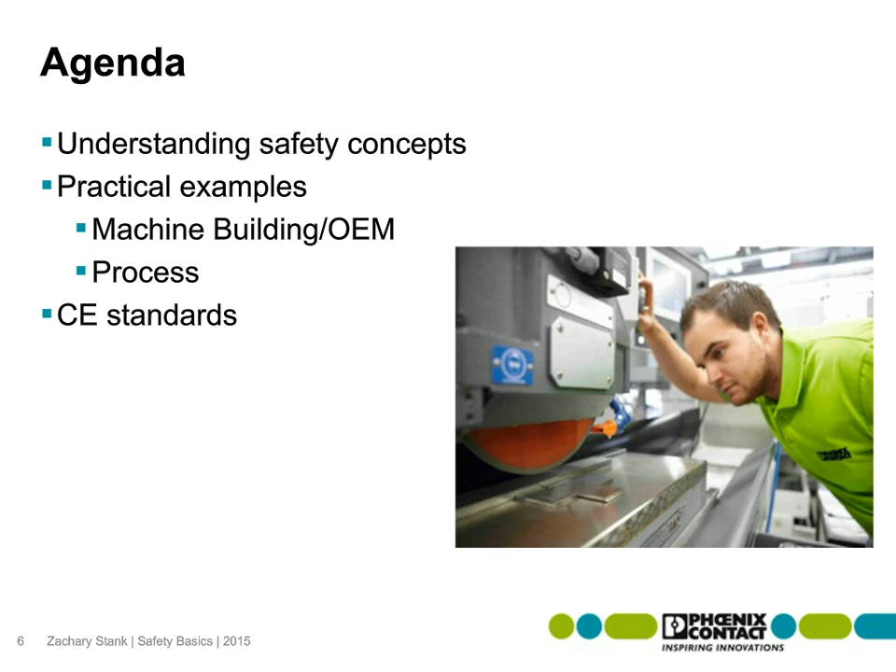So before we start, the first groundwork is to understand what safety is. If you go to the Merriam-Webster website to look up safety, you'll get these definitions. But really, the main thing to understand is that safety is the freedom from the occurrence or risk of injury, danger, or loss. What does that mean for us in the machine building world?

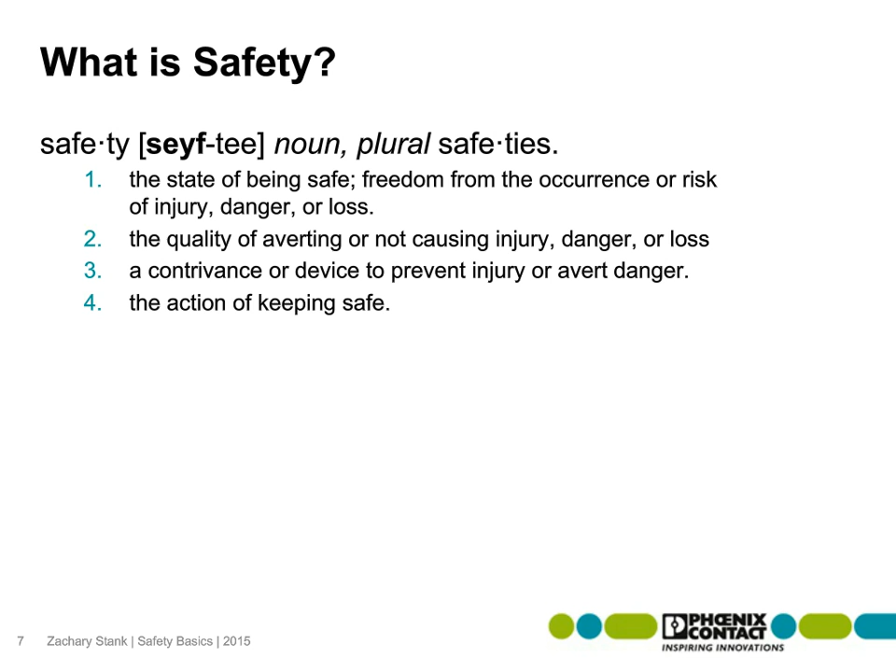Well, really there are three functional areas for safety: inputs, logic, and outputs. Inputs being guards, stops, sensors, light curtains, things like that, and outputs being contacts, drives, motor control systems, those types of operations. In between those two is logic, so that's relays and controllers. Logic is really what interfaces the inputs to the outputs and creates a safe circuit. For Phoenix Contact and safety, we focus primarily on the logic section, so relays and controllers. There are some Phoenix Contact devices that are drives or hybrid motor starters, but we don't do any input sensors at all. So when you think of Phoenix Contact safety, we're talking just the logical portion.

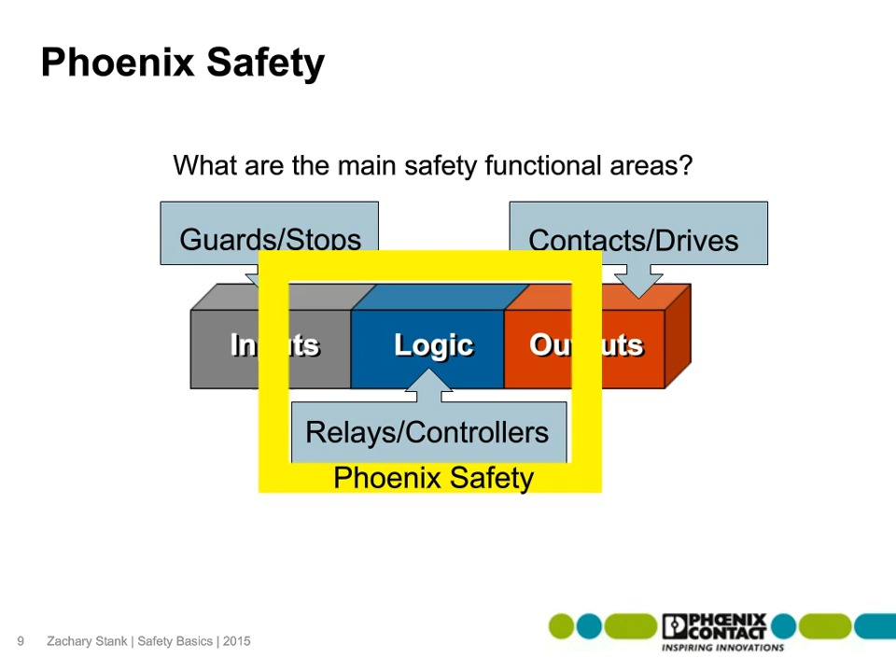I'm sure most of you have seen this before - what is a safety relay? Besides being a yellow-colored relay, a safety relay is a little different than a standard relay in that it carries some type of safety certification with it. Certifications are typically done for performance level, category, or SIL. They give it a special rating that it's been prepared to handle certain types of risk. What a safety relay really does is monitor input to make sure your devices are working properly and that your e-stops or input channels are not malfunctioning. It also monitors a machine start or reset button.

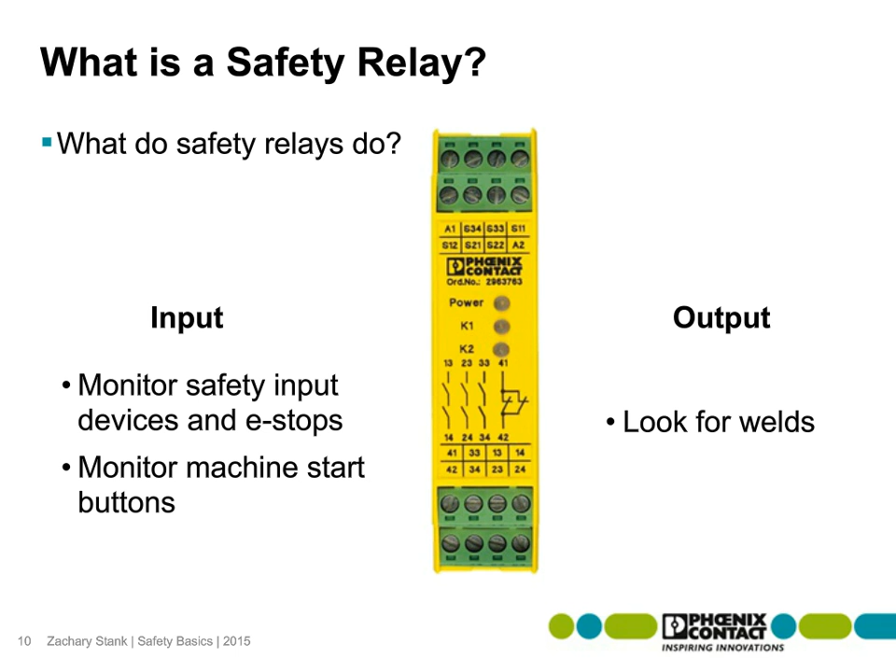It also looks for welds on the output channels to ensure that they're working properly. For most relays, you can also bring your output normally closed contacts into your restart to ensure that any welds on the output channel will be identified. So from a visual standpoint, you're monitoring the inputs to make sure they work, monitoring the reset to ensure there's not a fault, and monitoring your output contacts to ensure there's no welds. That's a very basic look at what a safety relay does.

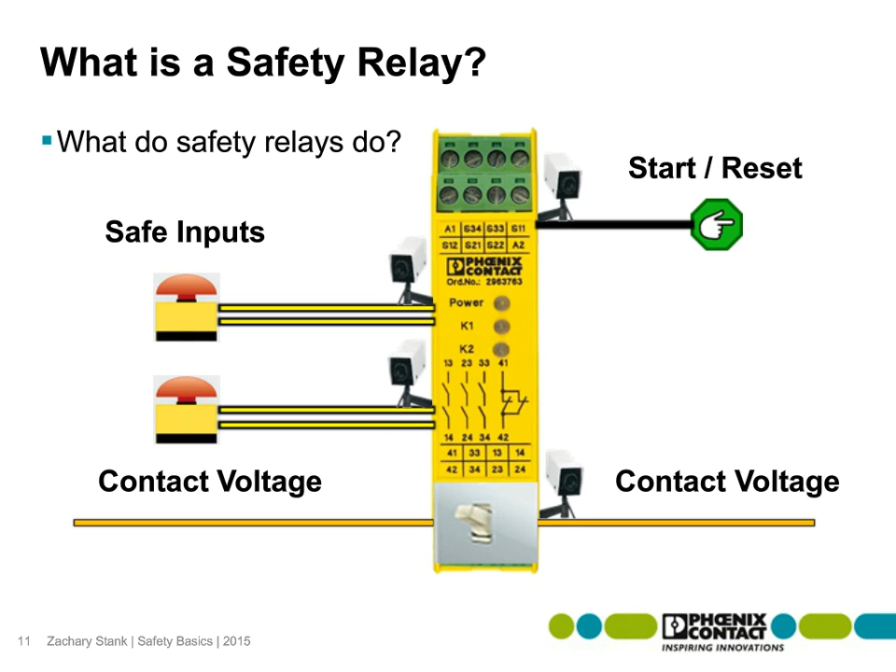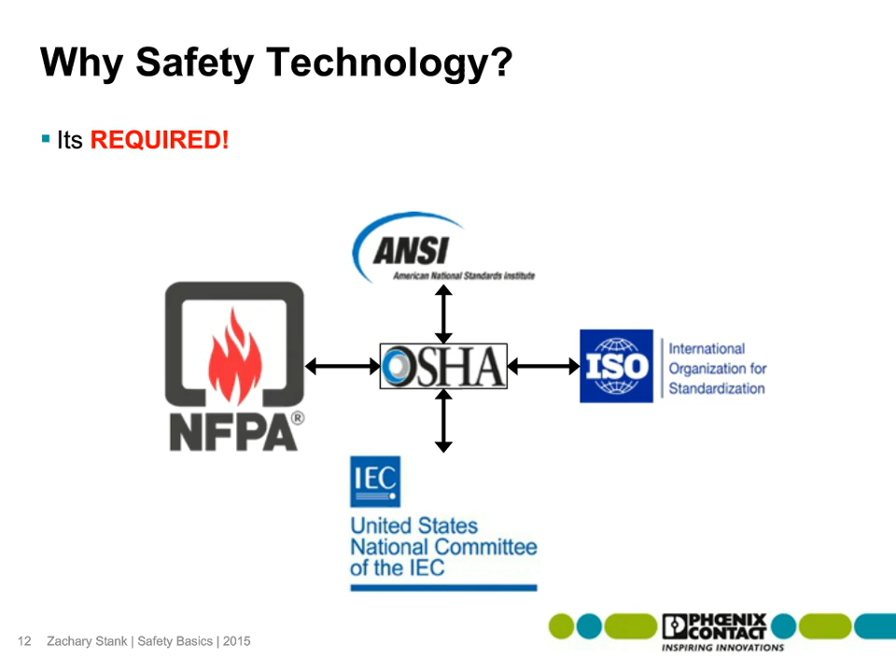So now, understanding the basics of a safety relay and what safety is. The main reason we do safety is because it's required, and the requirements for safety in the United States are all driven by OSHA. I'm sure everybody's familiar with who OSHA is and what they are: the Occupational Safety and Health Administration.

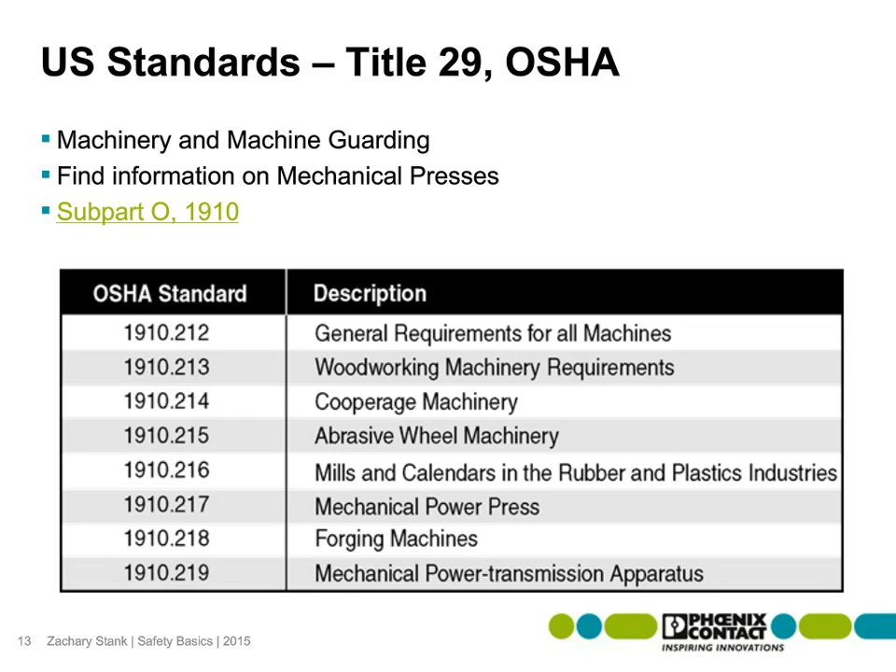Subpart O is what you're looking for again, and you can just go through all their standards online there. So I know most of you are thinking to yourself, great, my application isn't listed by OSHA, so I don't have to do anything. That's not entirely true.

The OSHA standards are quite old; I think the most recent update has been in the 80s, but they're always being discussed and taken online by OSHA. The other thing OSHA has is a right to reference clause. Essentially, OSHA is allowed to reference any nationally recognized standard and bring it into law at any time. For instance, they recognize NFPA 70 as the National Electric Code, so that is something you need to follow.

The other thing OSHA can do is hold you to any nationally recognized standard. So if you are making a machine and you're following an ISO standard or an ANSI standard based on your machine, if there's a problem, they're going to want to see what you followed, how you followed it, and why you did what you did.

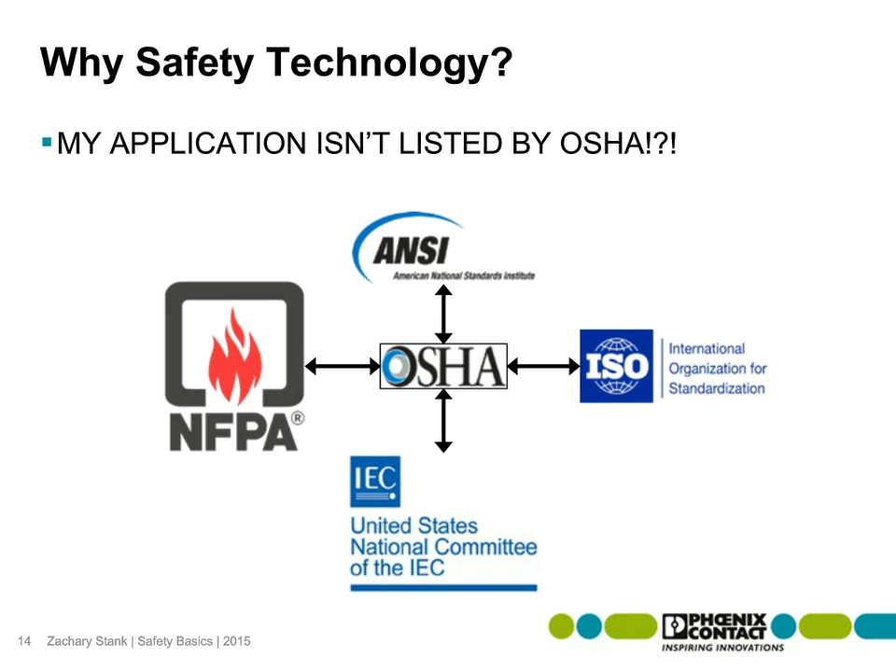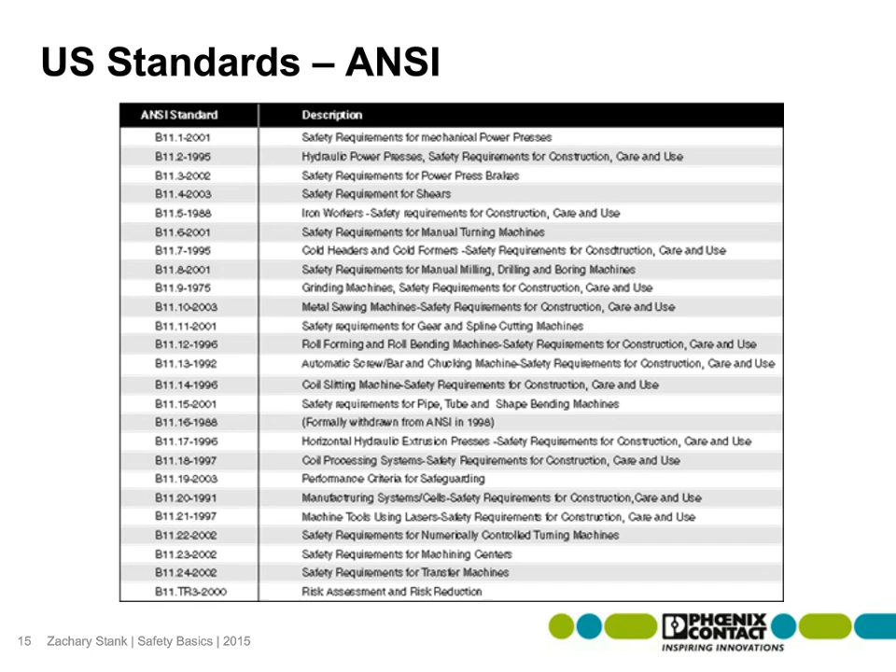But again, the most important thing to realize is that just because you have what you think is covered doesn't mean you looked at the standards and you're okay to go. You want to make sure you cover all your bases, and the best way to do that is, one, to understand what it is you're working in.

So if you're in robotics, you definitely want to reference the RIA standard. If you're machine building, ANSI typically covers that. Oil and gas has a couple different standards organizations; they pull from the IEC, and they have a couple local organizations down in the Gulf of Mexico you want to follow. It's important to go through everything and make sure you cross your T's and dot your I's. But a lot of people don't know where to start once they've actually read and understood what they're supposed to be doing.

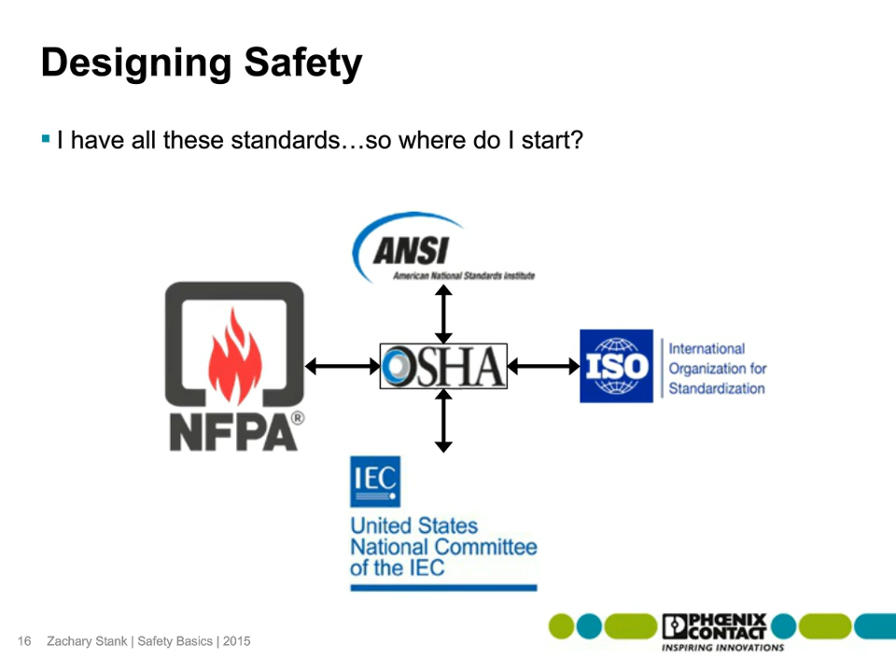How do I start developing safety, or where do I go to look and see if I've done safety properly? And the best answer to that is a risk assessment. Now, OSHA does require a risk assessment. However, they don't require it to a specific standard.

So that being said, there's 4 steps to a risk assessment. There's determination of the machine limits, hazard identification, risk estimation, and risk evaluation and reduction.

All these steps are very important, but I think one that a lot of people miss is the determination of machine limits. And what that is, is determining what are the parts of my machine, what are the most important things in my machine, what can I qualify or quantify. And a lot of people jump right to hazard identification, step 2, without actually going through and writing in everything you need to understand about your machine.

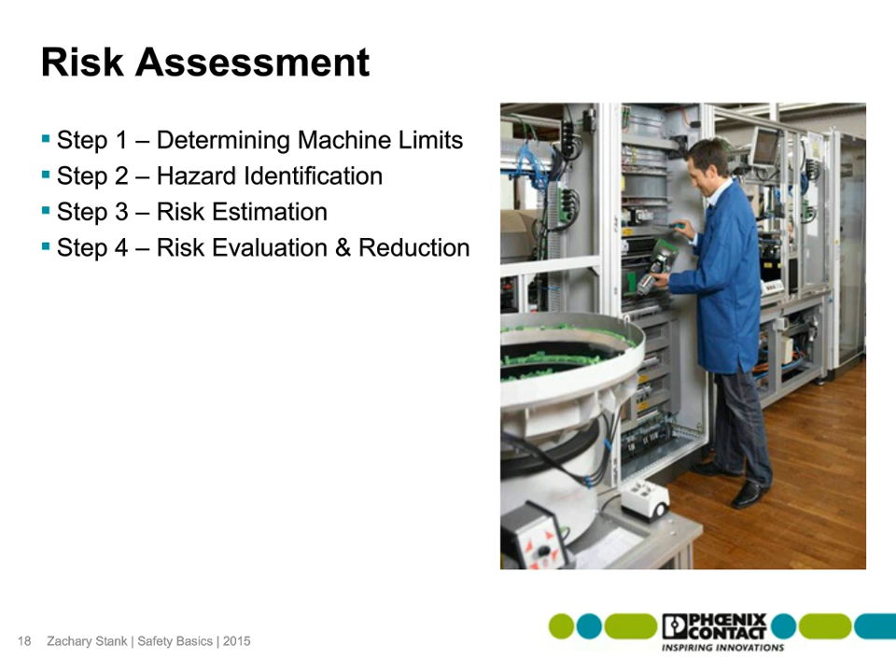And as a flow here, it's important that you start at the top so that you can follow the logical path to creating a safe system.

So for example, if we had a palletizer or depalletizer, you would want to record the dimensions, the weight, electrical, air pressure, cycle time between a pallet, material loaded, how's it loaded, when's it loaded, the product life, how long is it designed to be used for.

And while I'm saying you want to be doing this, your risk assessment team really shouldn't be a single person or just a single type of engineer. You don't want to have all mechanical engineers looking at a single machine because they'll look at it as a mechanical engineer would look at it.

You want all different facets of your corporation involved in the risk assessment. So you want floor operators, maintenance technicians, electrical engineers, you also want your machine engineers, maybe some desk office people that would look at it a different way. It's very important to include everybody in your organization in the risk assessment, not just so that you feel inclusive, but also that they bring different sets of eyes to each different type of application.

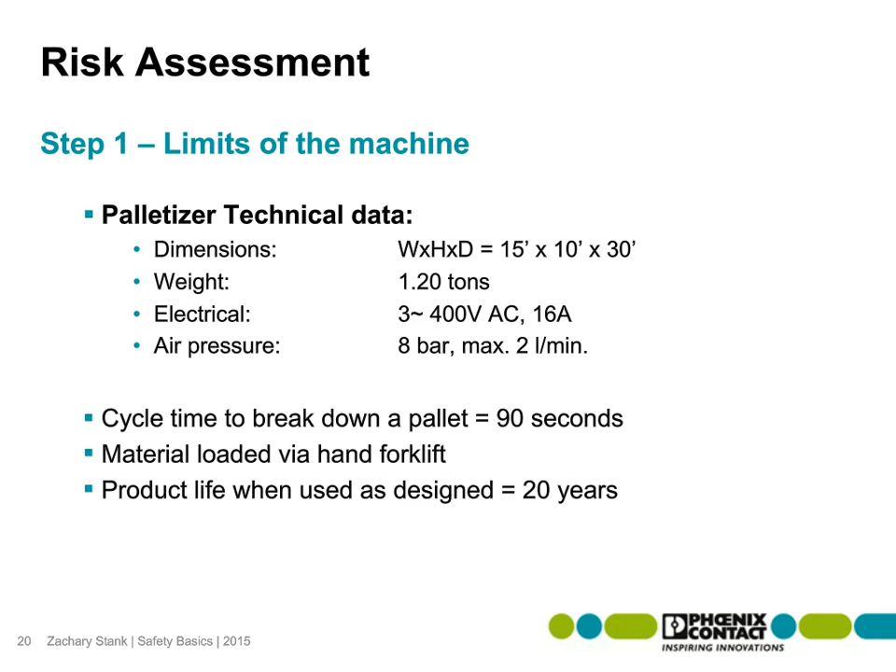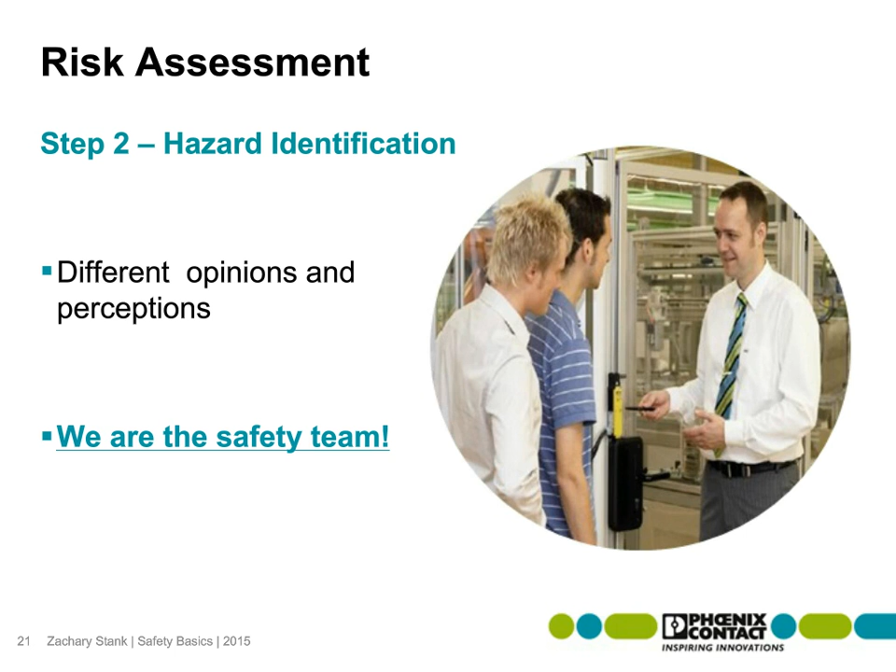So recording these down is important because now I have a list of what my machine actually is, and that's how I identify what my hazards are. Without this list of actual operational items from the machine, it's hard to identify hazards. Yes, you can go through and look at a machine and figure out what it's done, but if you're not actually quantifying what you're looking at, you could be looking over certain aspects of the machine.

So the last 2 steps are probably the meat of everything: risk estimation and risk evaluation and reduction. How likely is this event to happen? How dangerous is the event? How can the risk be mitigated, and is there a safety system required?

One big thing I see a lot is people get into the risk assessment, they start identifying the different risks on their machine. They'll have spinning blades, moving items, issues like that, and they'll try to protect everything with very, very complex systems. Now, very complex systems do work, but they're not always required.

A lot of times for a spinning blade or moving hazards or crushing hazards, a simple gate or just guarding against it, like a fence or something like that, would be sufficient in order to do it. And a lot of people jump right to adding safety product to it. There are situations where guarding against somebody coming into the apparatus is not possible, and a safety sensor and safety logic is required. But a lot of times you can build out the inherent risk of a system just by keeping people out of the area.

And really the risk evaluation and reduction needs to be done if, at times to load material or anything like that, people need to be within a hazardous area, or if there's maintenance time where you need to have specific safe control of a machine.

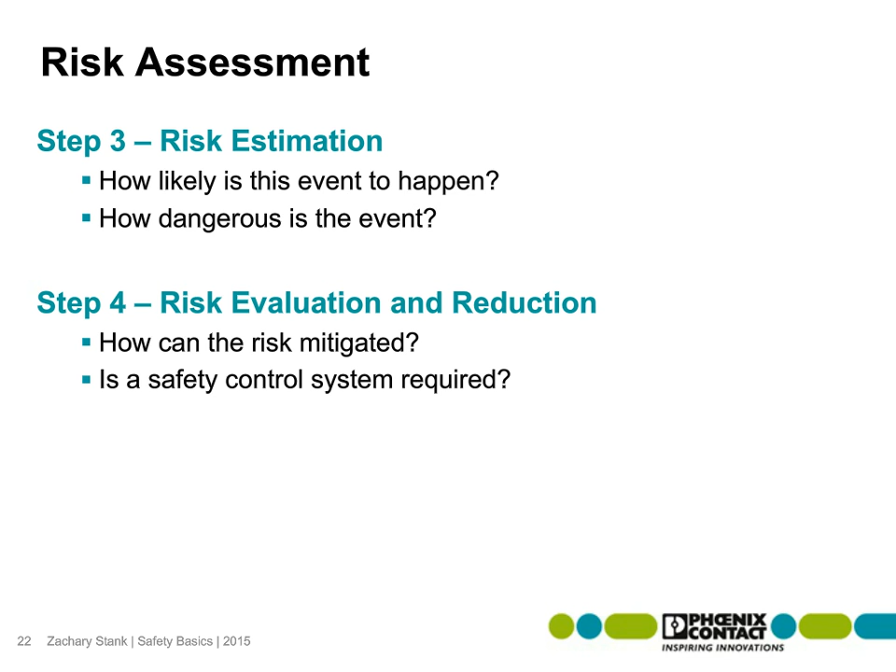So again, everything starts at the beginning by documenting it, and then at the end, you want to make sure that not only are you documenting, but you're also trying to make sure that the documentation is easy to read and that you're not jumping to conclusions.

So you want to understand the design features. Can you design out safety, or design in safety, or design out hazards to protect your workers or protect your machine from itself? If that's not possible, then you want to take protective measures. Try to keep people out of the area, stop motion, stop hazardous power when somebody enters that area or has to do something. And then most importantly, documentation. It's always important to label and put down hazardous areas or high voltage or things like that.

So a documentation step is very necessary in doing your risk analysis.

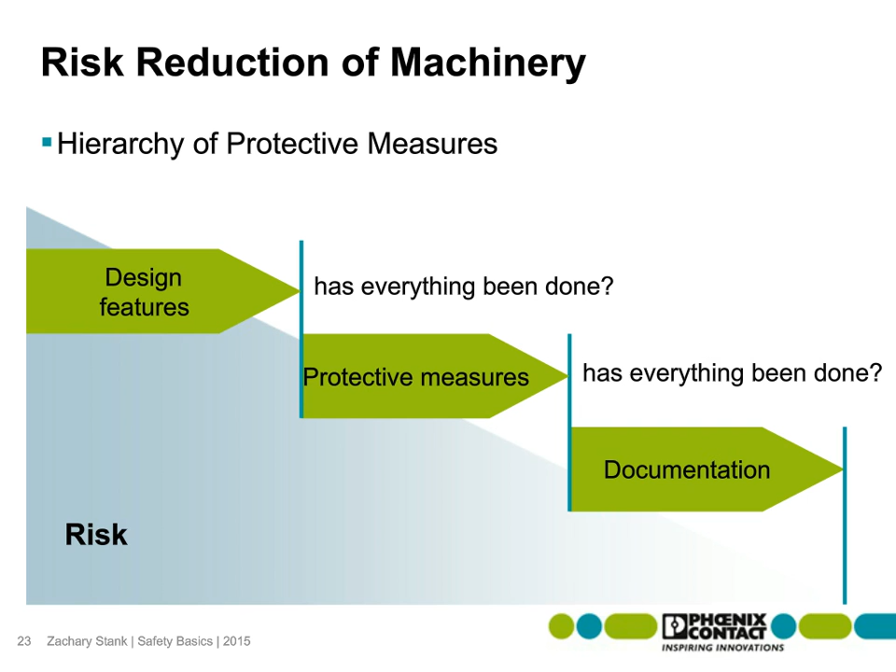So what are some of the protective measures you can take? You could do covers, gates, guarding. Protective doors will allow you to go in when necessary while turning off something. And then you want to protect against material ejection. If you can build a gate around something, or a fence, it's an excellent protective material. You definitely want to avoid people walking by and being in a hazardous area without even interfacing with the machine. So putting in some type of gate or guarding material protects the machine from ejecting, which is also a very good thing to follow.

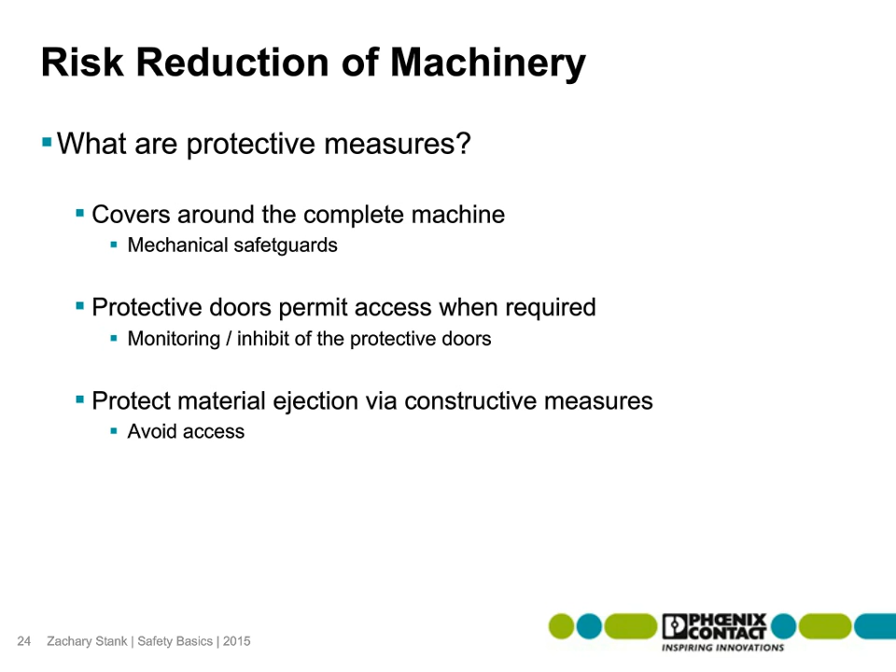So after you go through your risk assessment, you may have determined that a safety function is required. Again, this is an iterative process, so you don't want to just say, yes, we need to do some type of safety, okay, we'll put e-stops everywhere and we're done.

You want to define that safety function. One, because if you over-design, you'll be spending way too much money on safety and over-designing it for your application. And then, of course, if you under-design, you could be at risk for possible hazards and loss of life or product. So it's important to understand how much safety you need.

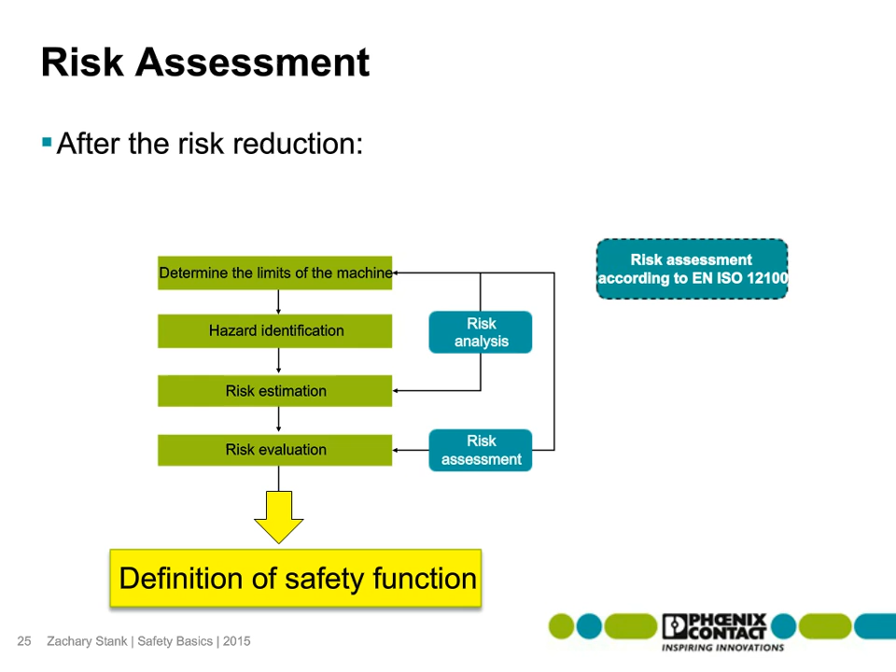The best way to do this is really to look at the European standards at the moment. The two big European standards right now are 13849 and 62061. 13849 is commonly considered the performance level standard, so you hear performance level and category, they're all lumped into 13849. And then IEC 62061 is the SIL standard for machine building. The parent document for that is 61508 and 61511. Also, that's the ANSI S84 standard.

The big thing here is to understand that in Europe, machine builders are ultimately responsible for safety. So from the time you have the concept, or you begin to think of an idea or put pen to paper for a machine, all the way to the end of life, 20 years after the machine is built, you're ultimately responsible for ensuring the safety of that machine. That means while you're building it, you're making sure no new hazards have been created, that nobody gets crushed while it's being done, or you don't accidentally allow power to start, and also that you provide maintenance schedules and the estimated time of life cycle of this machine.

So as you're going through, it's very important to understand, especially when you're shipping out to Europe, that legally you're held responsible for this. Whereas in the United States, it's not as clear cut that the builder, the operator, and the owner of the machine ultimately have some type of responsibility for it, but it's not as clear cut as in Europe.

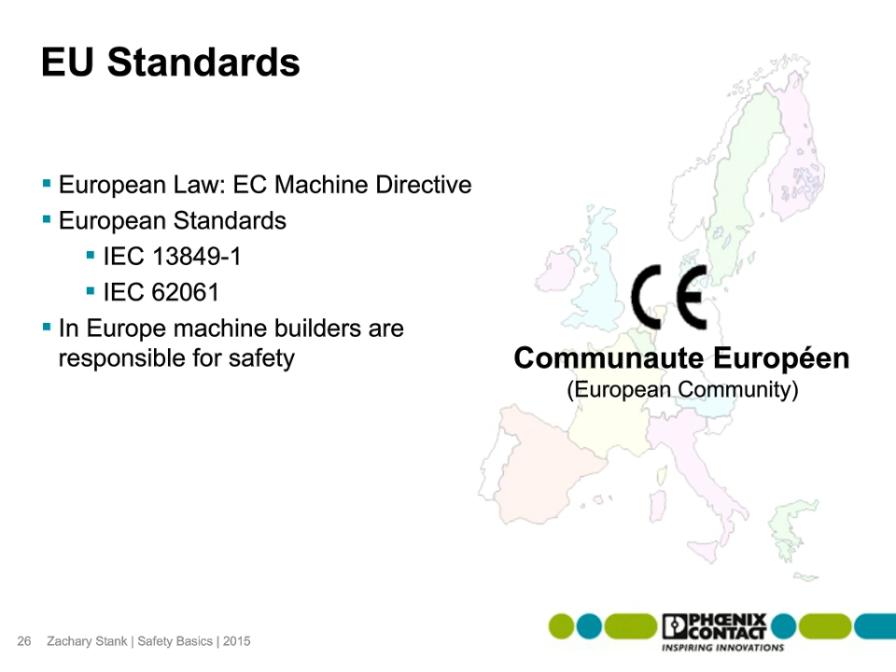So it's coming. The ANSI hasn't directly made its own standard like this that would mimic something like this, but it is in the works.

So we talked again about how there used to be an old standard that was category-based. It was ISO 954. If you're familiar with safety categories, essentially you had single channel and double channel. That's kind of been reworked, adding actual math and technical items to ensure you're not just designing safety based on how much you can spend, but also the needs of the actual machine.

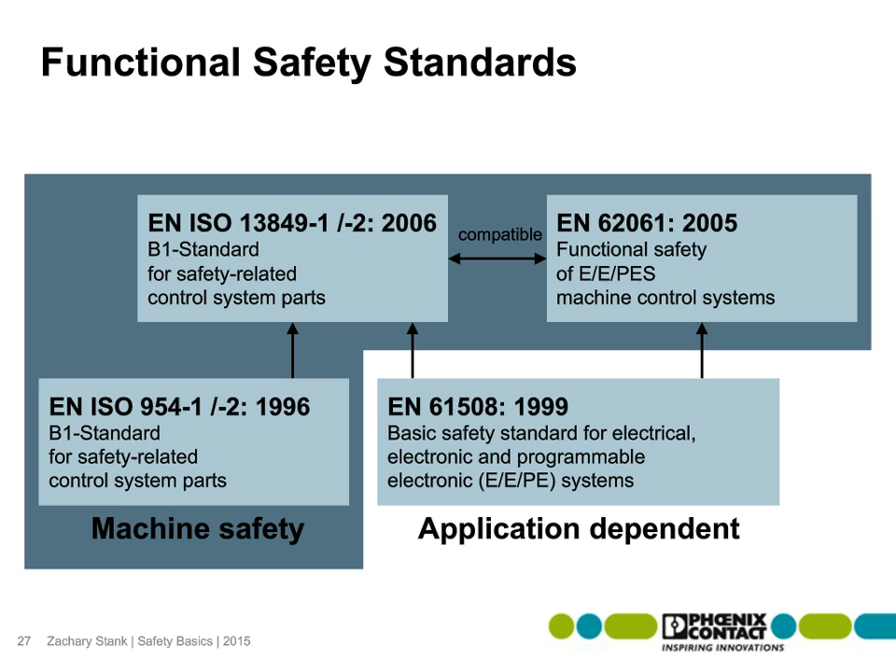From a flowchart perspective, it's quite simple. You ask yourself, is the machine safe? How do you reduce risk? You can do it by construction, using safety equipment, or user information. And if it requires a control system, that's when you need to start looking into how this needs to be done.

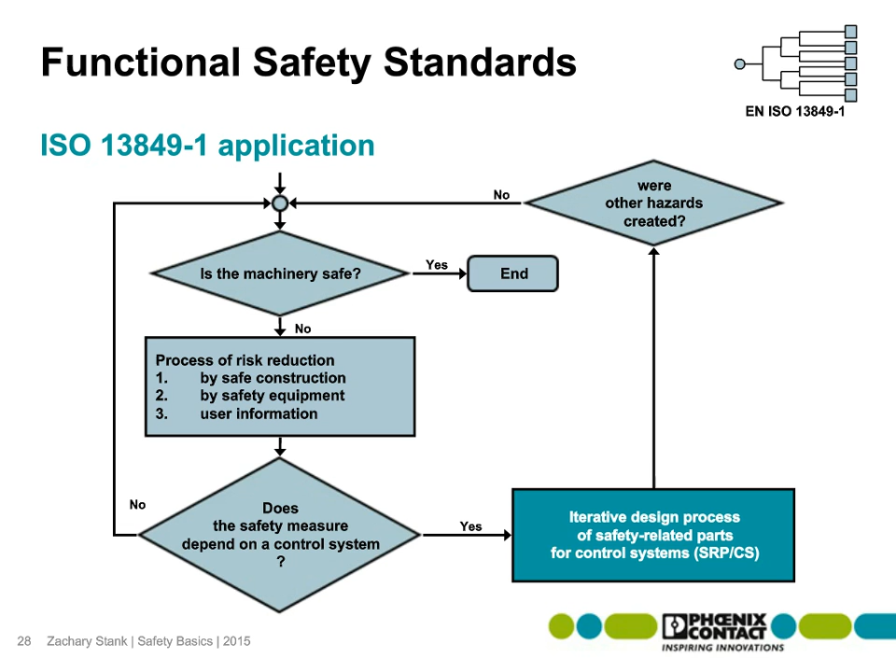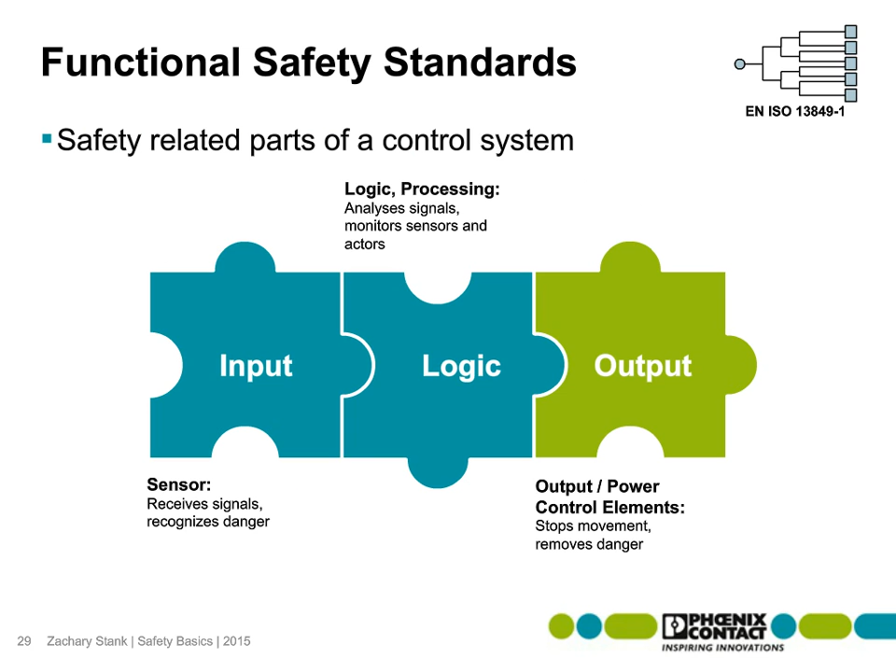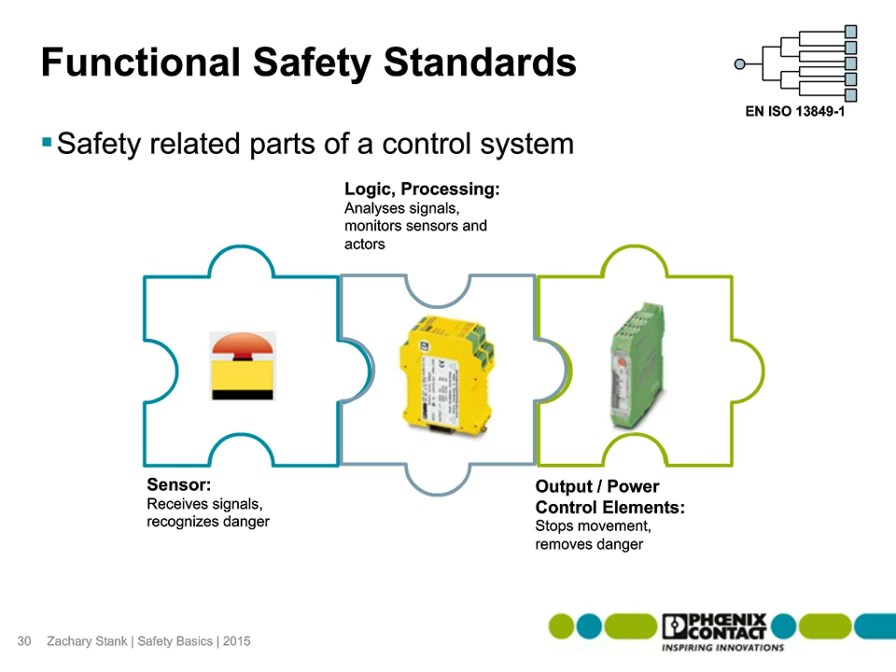So again, like I said previously, there are three separate parts of a safety system when it comes to machine building: input, logic, and output. It's very important to analyze all three facets of this. They're all taken together—think of it as a chain, and you're held to the weakest link. So if you're using really good sensors and logic and processing equipment, but you haven't considered safety on your output side, the weakest link in that chain would be your output, and you'd be beholden to that type of safety.

So according to the standard 13849, you really want to go through and figure out what performance level is required. You need to design it, verify it, and then validate it. Design is taken from an actual statistical point of view.

There's something called the probability of dangerous failure per hour. It's graded from A to E, so performance level A all the way to performance level E. The low end, performance level A, is low risk, so probability of dangerous failure per hour is every 10,000 hours. So you can have a dangerous failure every 10,000 hours of use of that machine, and it won't be that dangerous.

Low risk is minor injuries, bruises, small cuts, maybe some loss of actual material. Whereas high risk could be loss of limb, life, lots of material loss, and or damage to structures—that's at once every 10 million hours. Very high risk, and you're essentially making sure dangerous failures are very, very infrequent at the high end.

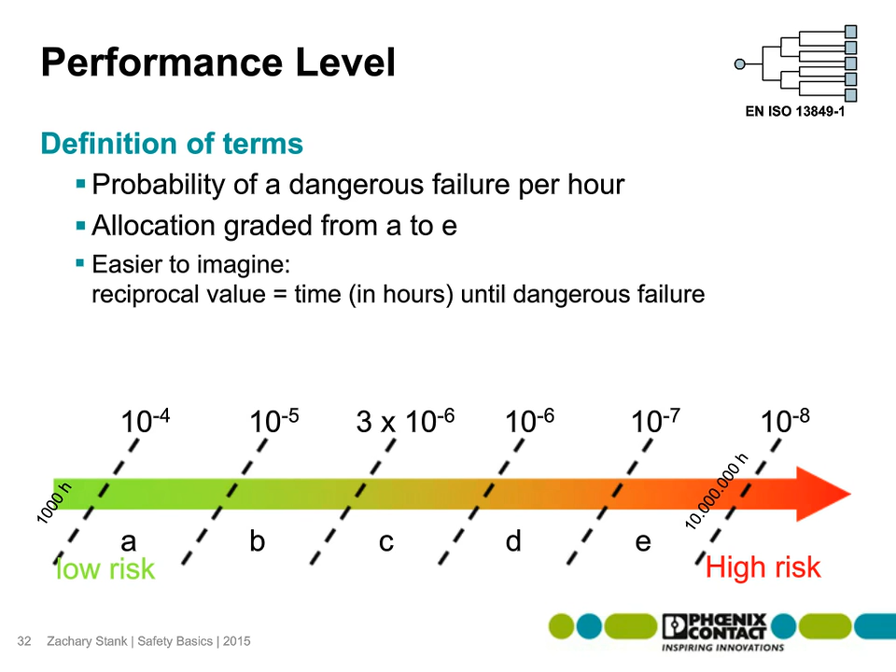So you can think of reversible as small bruises, small cuts. When you start to get to breaks and losing pieces of flesh, then you get into the S2 area. So that's how severe, or how reversible, the injury is.

Duration—how frequently is somebody in the hazardous area? Anything above once per shift is considered frequent. So if you're only in the hazardous area for maintenance once a week, that's F1. But if somebody's in there constantly removing input and output material, that would be F2.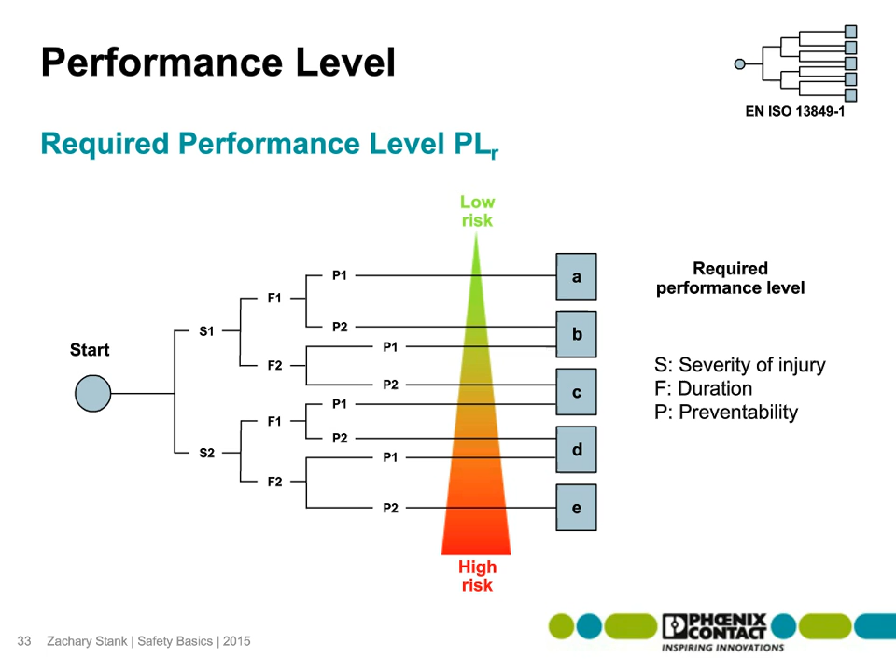Once you have that, then we get into design and technical implementation. If you're familiar with the control categories, they're still used within this. B1 and 2 are essentially single channel design—I have a single input with a single wire going into a single logic controller that goes out to a single output. Remember, the weakest link in the chain is what you're going to follow.

So if I have redundant inputs going into a single logic controller, and they're daisy chained, then the single input would still be only single channel. If my outputs are going outside of my main cabinet and they're being daisy chained on the output side, that again would be single channel. Category 3 and 4 are redundancy. The difference between 3 and 4 is that in 3, not all errors are monitored, whereas in 4, all errors are monitored.

And that was kind of the problem with the old standard. It was tough to understand when some and all became the same.

So if we look here, we also include component quality now. MTTFD is the mean time to failure dangerous. That's not to be confused with MTBF. They are related, but they are not the same. MTBF is mean time between failures, but for safety, you're not looking at the mean time between failures. You're looking at the first time you have a dangerous failure, because that first dangerous failure is going to be the problem. So they incorporate something called diagnostic coverage, or test quality.

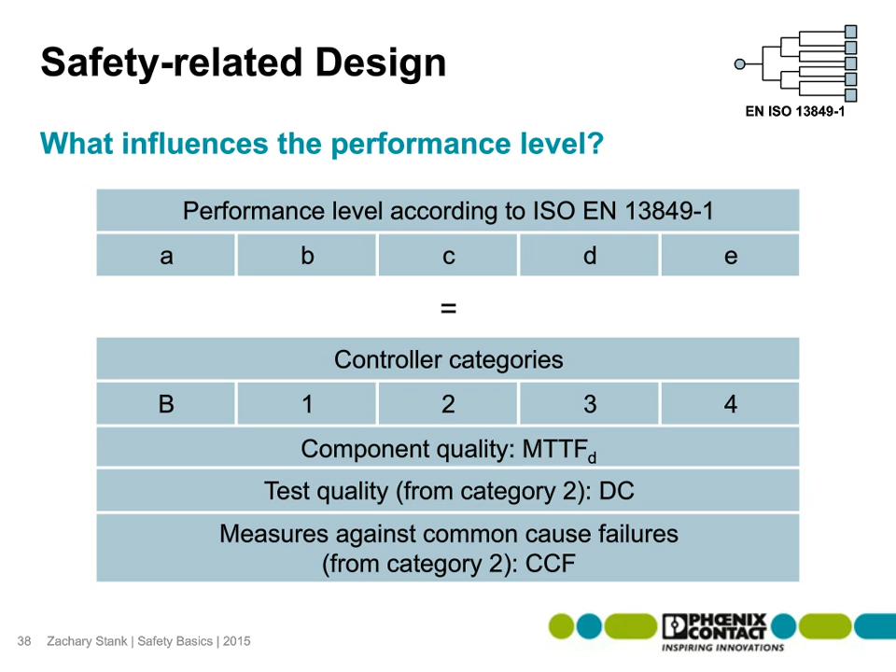So if we go back to the control categories, let's look at it here. Here's a real quick slide you can reference of safety categories for design. Again, the most important thing to remember is B and 1 are single channel, and 3 and 4 are dual channel the entire way through.

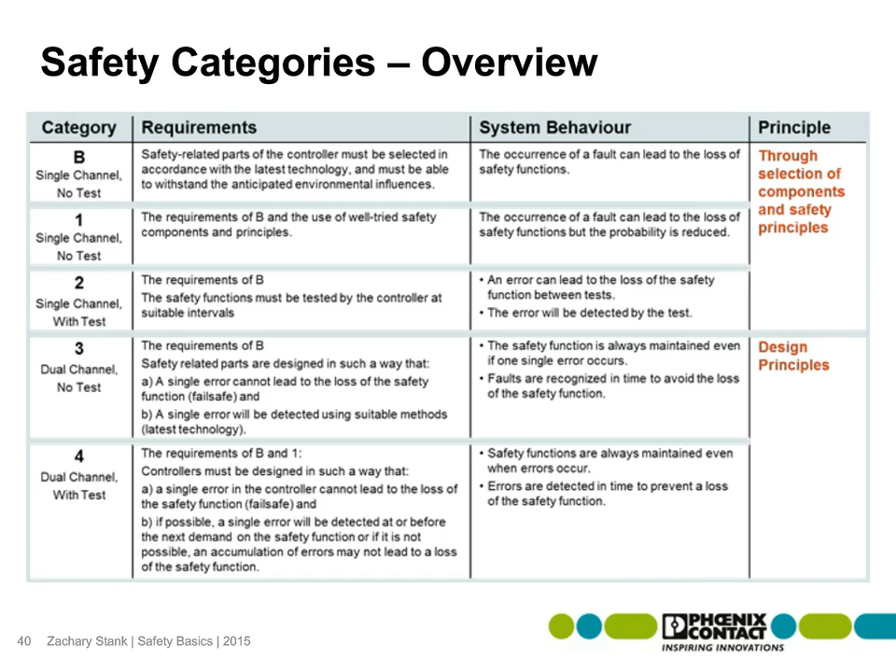So the solid lines identify that you have a really high diagnostic coverage. You're able to determine whether there's been something amiss within the rest of your setup.

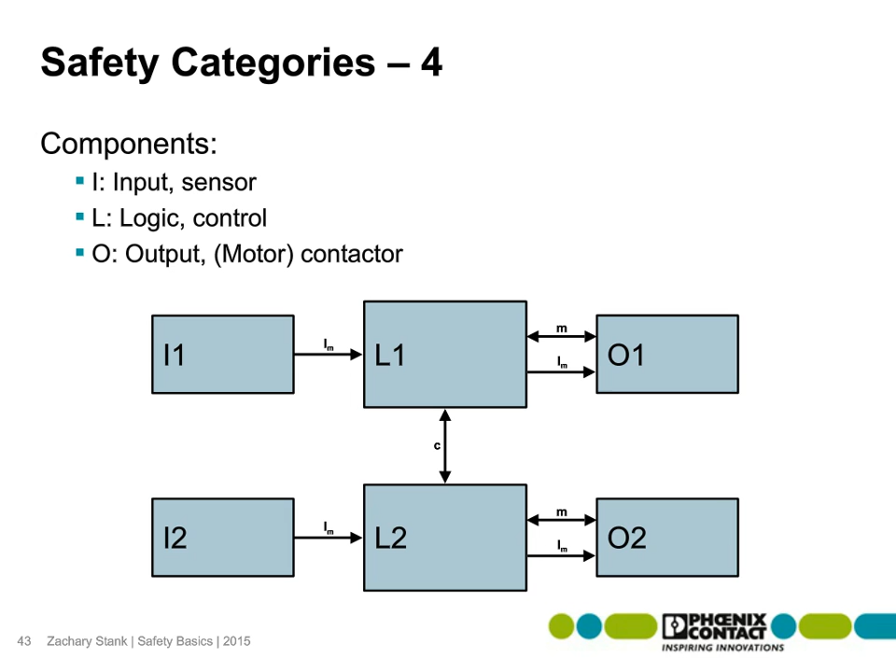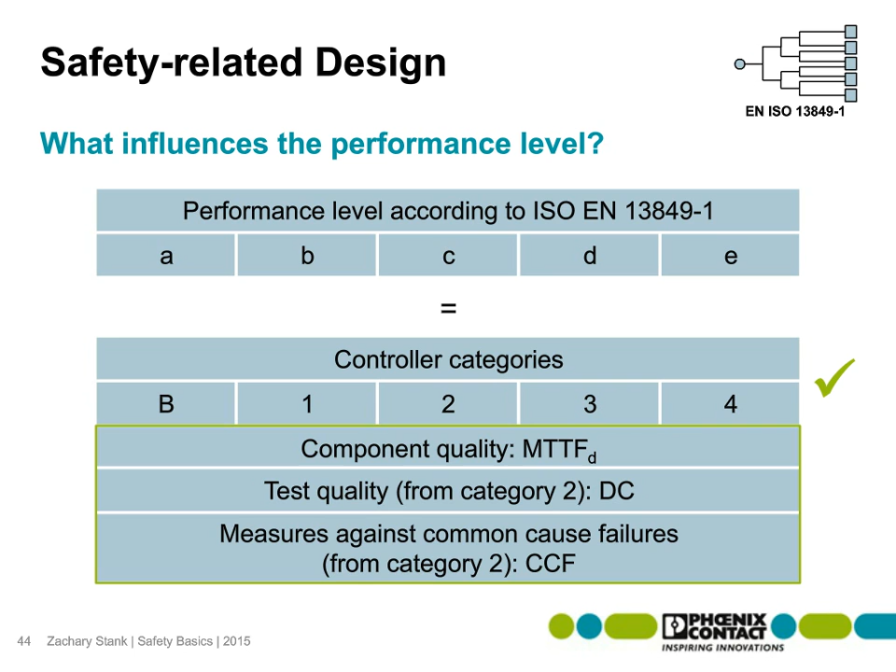So again, we understand categories - it's something we've all done. Then we have component quality, test quality, and measures against common cause failure. Really what these do is they get you to this graph - the relationship between diagnostic coverage, category, and mean time to failure dangerous.

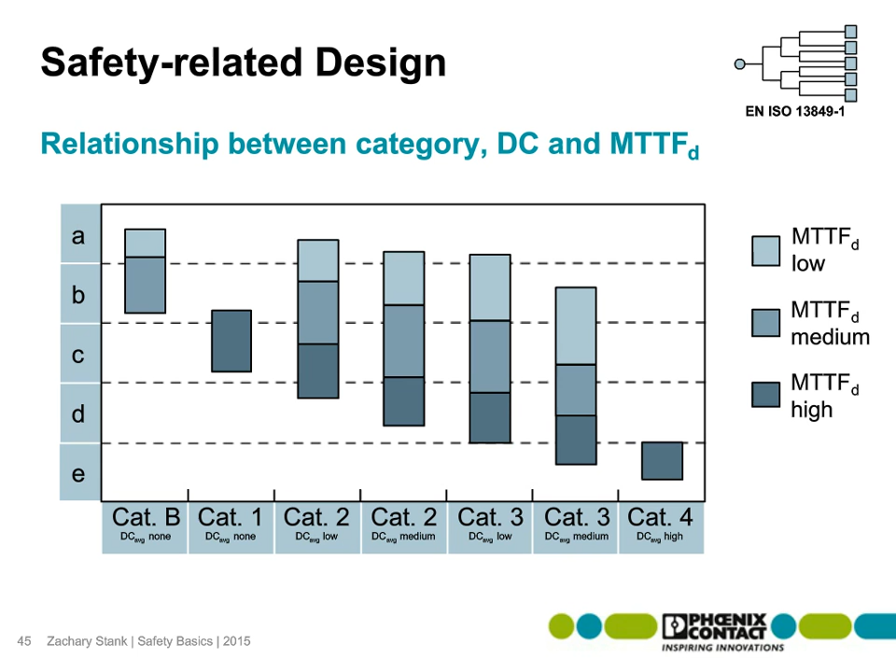And there's a really specific way to read this. The first thing you want to do is identify what category you're using. So let's say, for example, I'm using a category 1 or B design for my system. So then I would identify this here - sorry, I screwed up, let me try that again. So I would identify that by seeing where my category B is at the bottom. You can see category B, category 1, I would fall within this range.

If I were anywhere else, category 2 or above, I would then take into account my diagnostic coverage. You can see category 2, 3, and 4 have different DC averages. The difference between category 3 and category 4 is that some faults are determined in category 3 and all faults are determined in category 4, or everything is monitored. That is essentially the difference between DC medium and DC high.

So I've identified my area here by my category design - I'm category B or 1. Now I need to go ahead and identify what type of component I'm using. I'm using an MTTFD that falls within the medium range. The low, medium, and high are actually quantified within the standard - I just didn't think it was necessary to go through those calculations here. If you actually read the standard, it'll give you what low, medium, and high mean for each of these. Most manufacturers now provide this information along with their safety sensors or safety relays. So I can take it, look at my medium within this category here, and you can see that I fall within this range. So I have a motor protection B when I decided to use category B or 1 with these type of components.

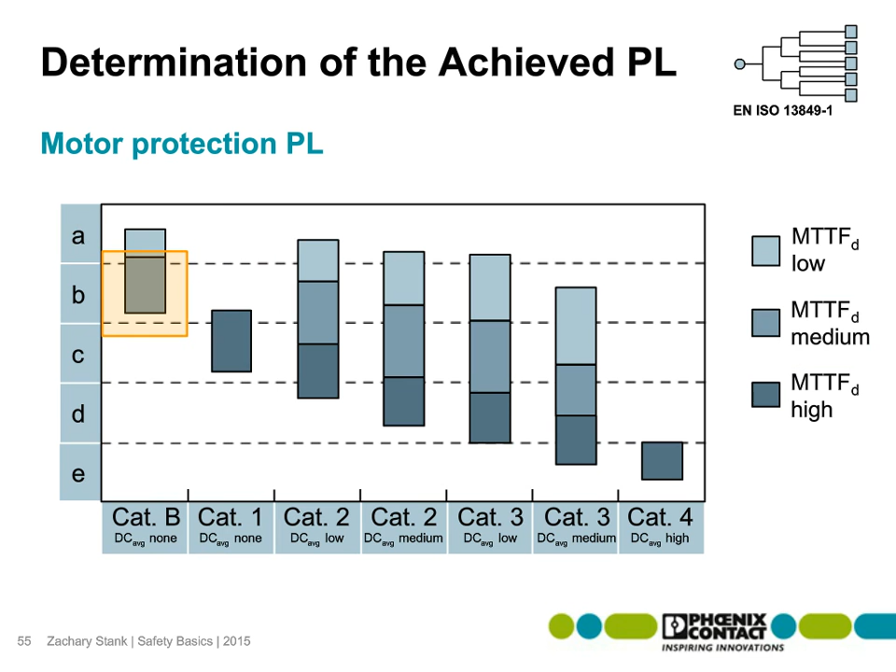Let's say I already have an existing system. My two inputs were performance level E type light curtains, and my safety relay is performance level E, the highest rating it could get. I don't know what my contactors are, but I went through my calculation and found my contactors had an MTTFD of medium, and I was only using single channel. So from that graph, I figured out performance level B was the best I could do. Again, weakest link in the chain—even though my inputs and logic are performance level E rated, because of my design and output, I'm only performance level B within my system.

A lot of confusion comes in because there are things you can do to get redundant outputs with a single channel output—one output going to two different contactors. That's called the fault exclusion principle. It's discussed more in the standard, and essentially it means you can use a single output from a logic device to control two contactors as long as they're within the same cabinet. You're protecting against a cross circuit that's more typical when they're outside the same cabinet. So if your contactors are in the same cabinet as your logic module, it's very frequently done with a single output going to two in-series contactors.

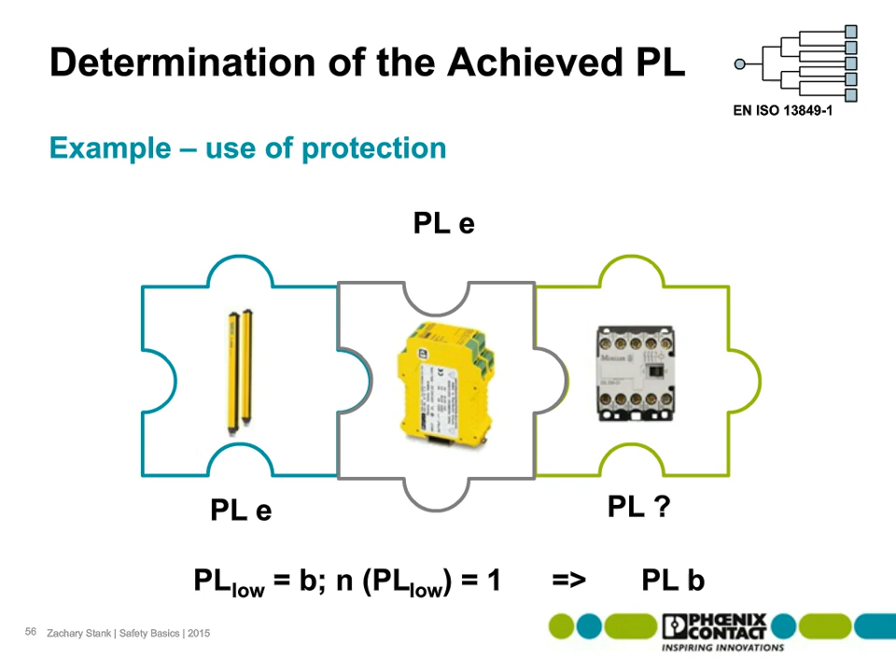I know this is a bit overwhelming for a 30-minute presentation, but the nice thing is there's software available, and it's not a Phoenix Contact software—it's from a German professional institute. It's called SiSteMa. SiSteMa takes in all the standards, the 13849 standard information, and incorporates it into a really easy-to-use software that's free. It walks you through the specific steps and parts of your system, asking what design you're using, what category, whether you have diagnostic coverage. A lot of manufacturers now also include a library for SiSteMa, so for Phoenix Contact parts, you can bring our library into SiSteMa and it makes your calculations easier.

The nice thing is it tells you the required performance level you need, you can determine your achieved performance level, and it gives great documentation to go along with your machine in the end. It's a click-based system in an open window where it does all the documentation for you, and then you can print it out and deliver it with your machine.

And this is a free download—again, the link is there. It's the BGIA out of Germany, and it's directly helpful with the 13849 standards.

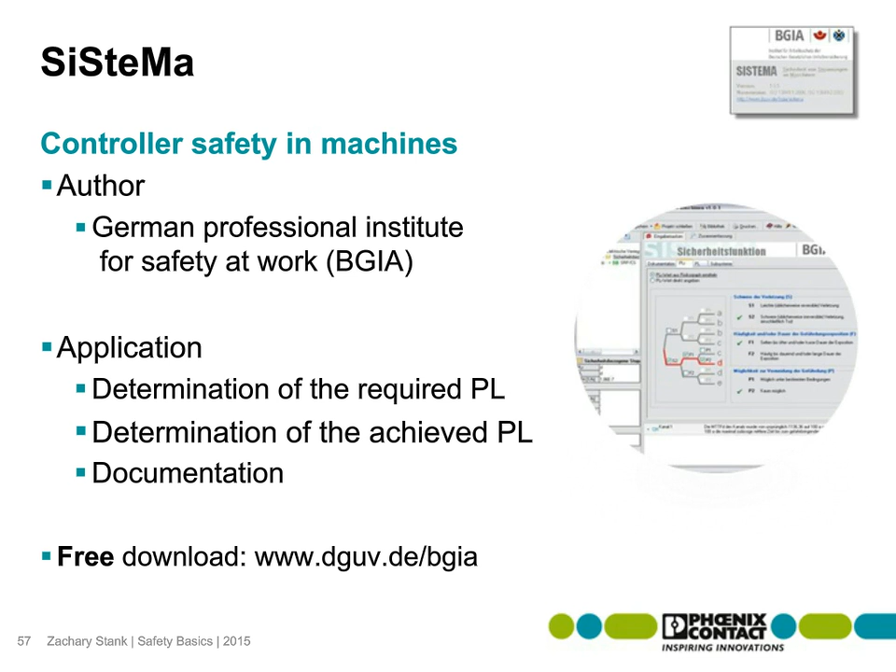Since you're talking about the 13849, does OSHA recognize that as a safety standard? OSHA only requires that you do a risk assessment. I'm sorry, was the question about the risk assessment, or was it about the European standard, the 13849? Sorry about that—the 13849 is not directly referenced by OSHA anywhere.

OSHA doesn't have anything that directly matches up with 13849, but some of the other standardization bodies are starting to incorporate 13849 practices into theirs. For example, the RIA already has a standard, the ANSI RIA ISO 10218 standard, that directly references 13849. So the answer would be no, OSHA doesn't directly say to use the standard or that it meets requirements, but the nationally recognized bodies that OSHA requires you to use are starting to use it.

So by default, yes, it is being used throughout their standards, but no, it's not a requirement of OSHA.